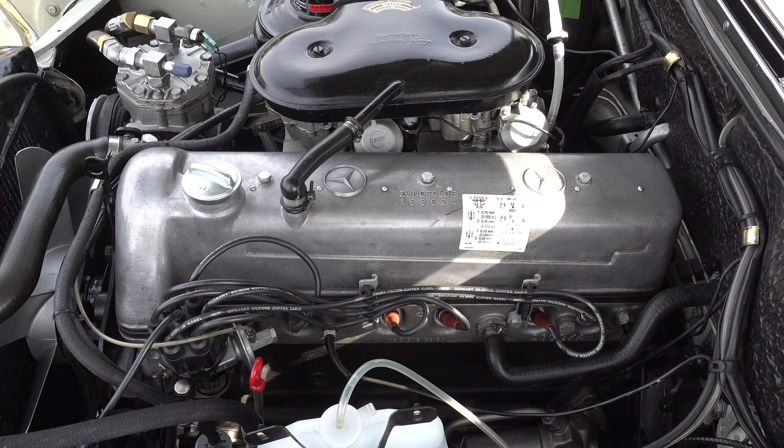I do believe this model series represents the beginning of the golden age for Mercedes-Benz quality, and to explain why, I'm going to give you a brief overview of its history. I'm also going to talk about the model grades, the exterior design, interior features, have a look at the powertrain, how much it will cost to own, and then I'm going to drive it.

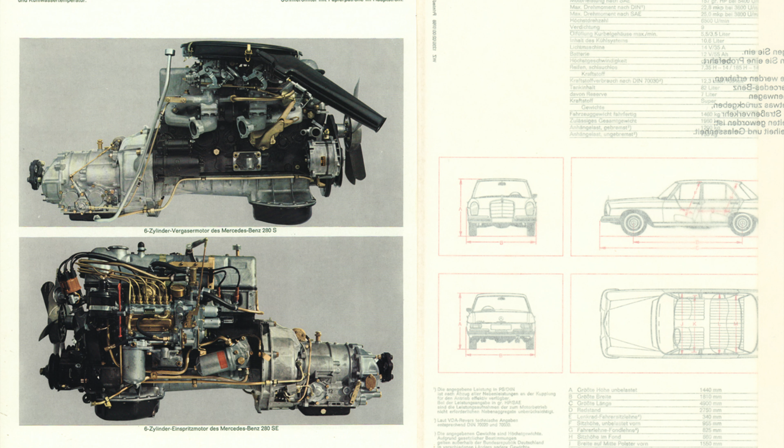Let's now talk about a brief overview of the W108. It was in production from 1965 to 1972, replacing the W111 fin tail. The W108 was available in standard short wheelbase or the long wheelbase known as the W109. In terms of powertrains, there was a choice of carburetor and fuel-injected engines. The W108 featured crumple zones, all-round disc brakes, special door locks, and certain models came with air ride suspension. You may have also seen the 108 series in certain movie appearances like James Bond's Octopussy and The Driver, featuring Ryan O'Neal.

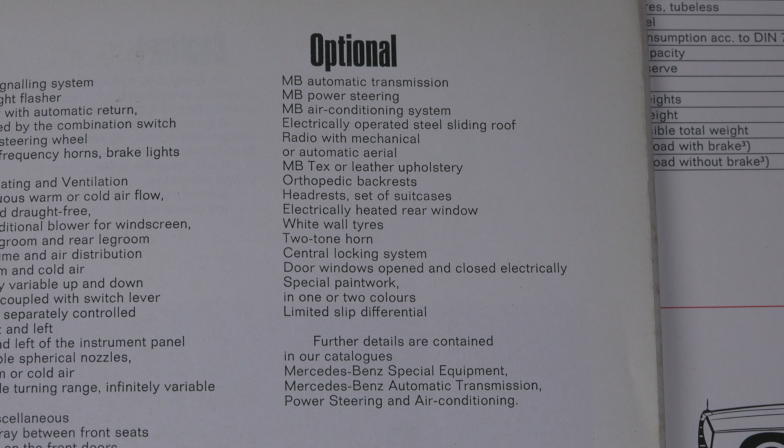On request as options, you could get electric windows, a power sliding sunroof, power steering, air conditioning, headrests, and in the center, the optional Becker Mexico FM and AM cassette player. This switchgear up top here are your heater controls, so you do have two air vents on either side that blow out hot air.

In terms of transmissions, 108s came standard with a manual column shift, and as an option you could get an automatic column shift, or a floor shift automatic, and those examples are very desirable. However, the manual floor shift, which this example is fitted with, was a very rare option, especially on Australian delivered vehicles. It's a very nice transmission, nice smooth shifts, and the clutch is nice and light.

You have a glove box here, and an ashtray with a cigarette socket, along with pockets on the doors. Moving towards the back seats, there is loads of space back here. Good knee room, loads of toe room, and loads of headroom, plus an ashtray, windy up windows, and an armrest that folds out, including a large grab handle and the original seat belts.

And if we have a look at the boot, you just push this button and lift up the boot lid, and it reveals a large space. There's plenty of room back there for a few suitcases going away.

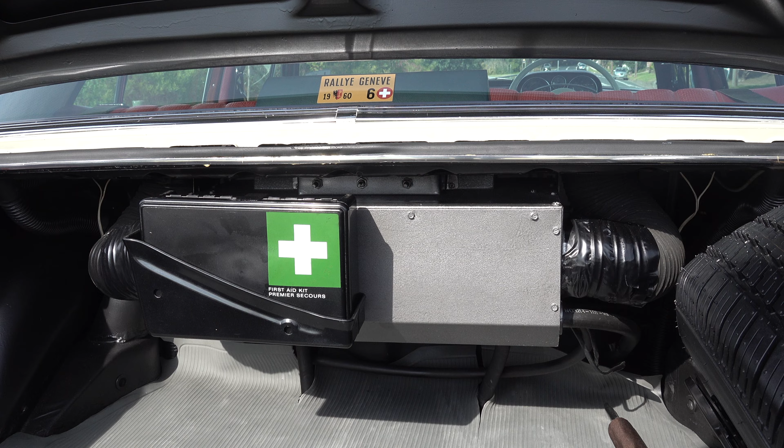Towards the back there is an aftermarket air conditioning system, but in terms of the car's originality, it does feature its original first aid kit, warning triangle, the toolkit, along with its tyre monitor gauge, factory spare tyre, and even all of its original logbooks, factory literature, service history, and the technical data sheets.

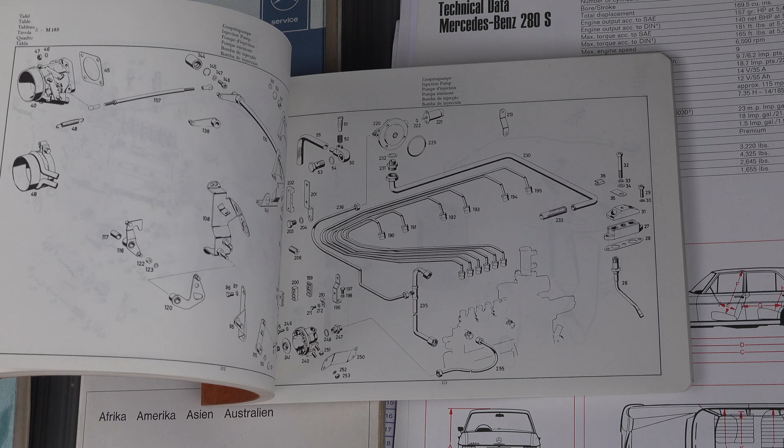But what I find interesting is the owner's manual. Obviously it tells you basic information, how to operate the lights, door locks, the radio, just like in any other car. But as this was a car that you kept for life rather than the warranty period, it tells you how to service the car correctly.

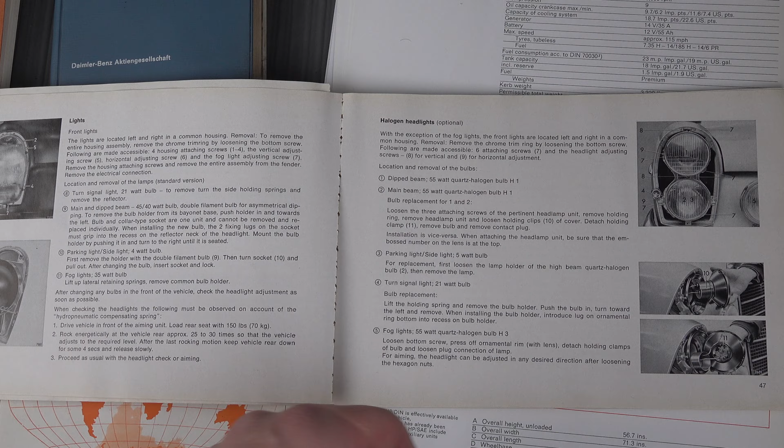So for example, checking the oil, checking the water levels, all the hose connections, how to check the water pump operation, the fan belt and tensioner pulleys, and even check the cylinder head gasket if there is likely to be water in the crankcase. You'd even refurbish parts like the radiator, sending it off to Mercedes-Benz to have it boiled out and restored.

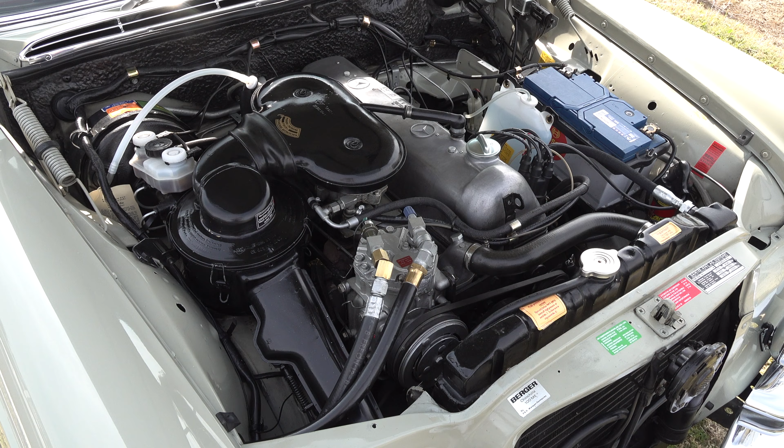Let's now move on to the powertrain. There's a tab on the right hand corner, just lift that up, and under the bonnet the 280S is powered by the M130 920 engine. It develops 103 kilowatts and 224 newton meters of torque with fuel fed by twin carburetors, and it drives the rear wheels via a 4-speed manual transmission.

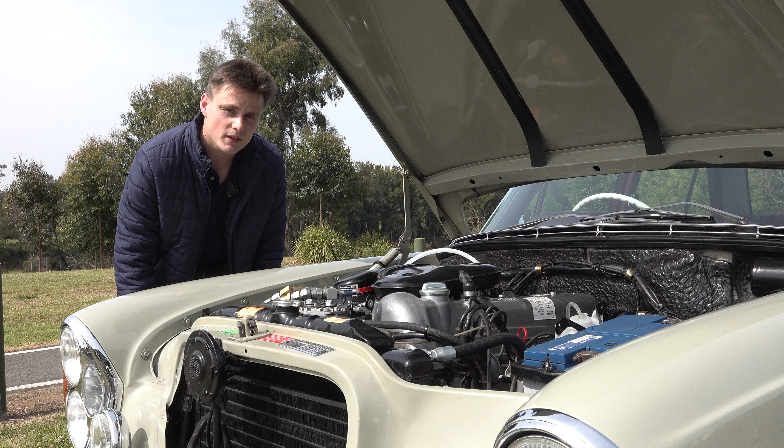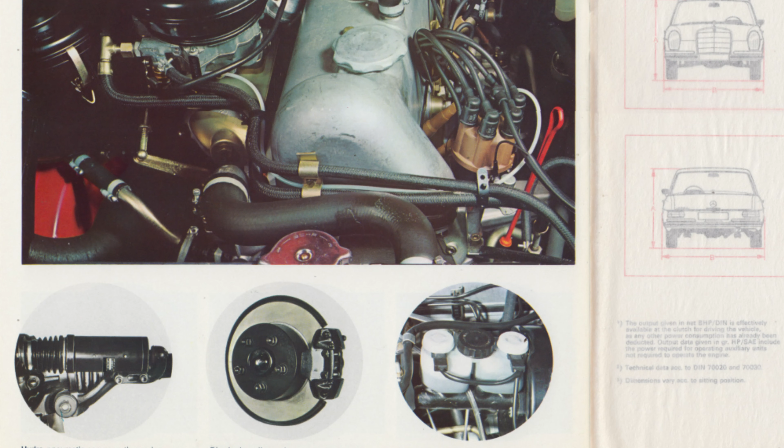So with the specifications out of the way, let's see how it performs on the road. The thing you need to get used to is the miles per hour over kilometers per hour. Once you master that, it's pretty easy to drive every day. It's one of the very few classic cars you can drive as a daily. Certainly, if you choose to drive it as a daily driver, this car can fulfill that. These cars are designed bulletproof.

They're designed to be invincible if you look after it. There is a lot of wind noise around the cabin. Naturally, there are rubber seals which are not as airtight as modern cars. As you can appreciate, this is a 50-year-old car. The technology back then, compared to modern cars, is chalk and cheese.

But the sprung seats give you a lot of support. You can definitely drive this car for hours on end. It was designed for the Autobahn, and it sits on the road flat. This car is well capable of handling that sort of RPMs going in a straight line.

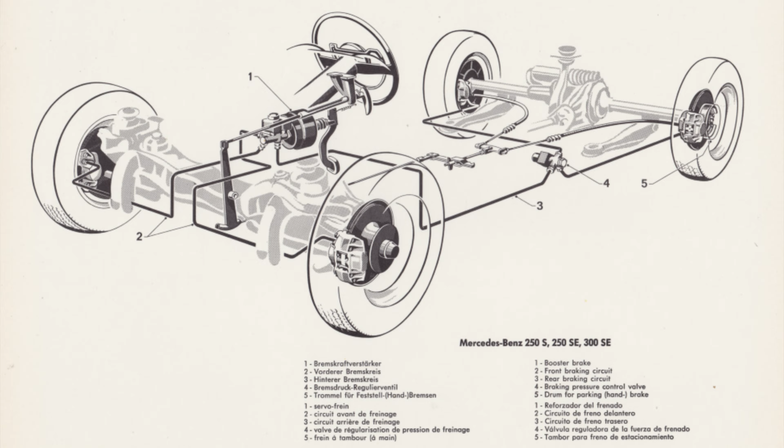So this has the recirculating ball steering setup with the power steering box. At least it does have modern features, power steering, disc brakes. It's really light too, like just changing gears.

And there's no rev counter. You actually have to listen out for your revs. So you have to really get to know the car. It does have good power, and it's got good steering too. You do have a good sense of what the front wheels are doing. Good all-round visibility too, you've only got that single mirror for your blind spot.

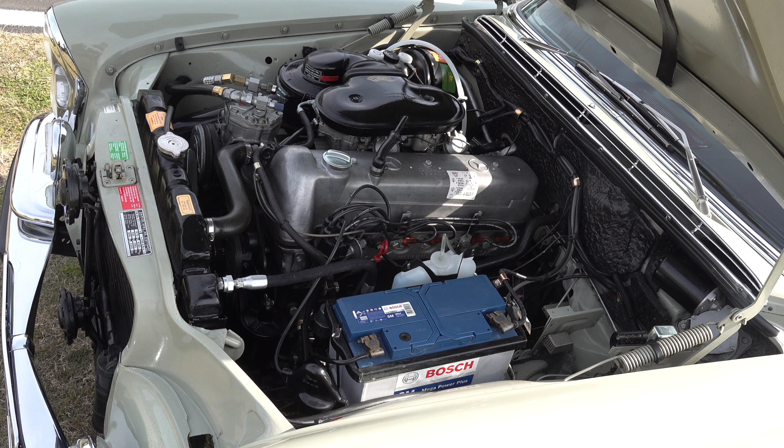But apart from that, it's pretty much normal. No, definitely, it has very good clearance, visibility I should say. To keep this car in healthy condition, it has to be driven consistently, even for a short distance, but it must be started at least once a week so the engine's rotating and the oils are mixed.

Ever since I bought the car, I have taken it to Joe Simons of Vestar Auto. He's very knowledgeable when it comes to 108s, or any Mercedes for that matter. He's looked after this car, and ever since getting it serviced through him, the car has gone better and better after every service. So the car you're driving today is because of his assistance and help.

It took me about 6 months to find this car, and I drove it. The car was solid, squared, everything was straight. There was no rust, no oil leaks or anything like that, but it still needed a little bit of mechanical work. Apart from regular oil changes, what other things would you look for buying a second-hand 108?

Obviously there's rust, finding one that is Australian delivered. What would you look for? Most definitely rust is one thing, and the second thing is how well it runs, whether there are oil leaks, how the transmission responds, how the throttle and brakes feel, in a general drive of the car, and how the car is talking back to you.

That's the first thing I look for. Mechanical stuff you can fix up, but when it comes to rust, it becomes a very costly restoration after that. Considering these cars are old, finding parts is getting harder every single day.